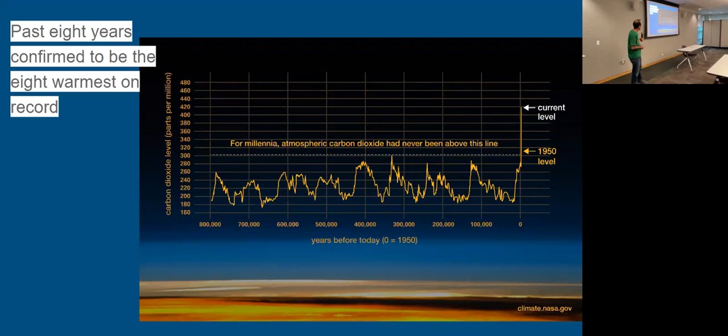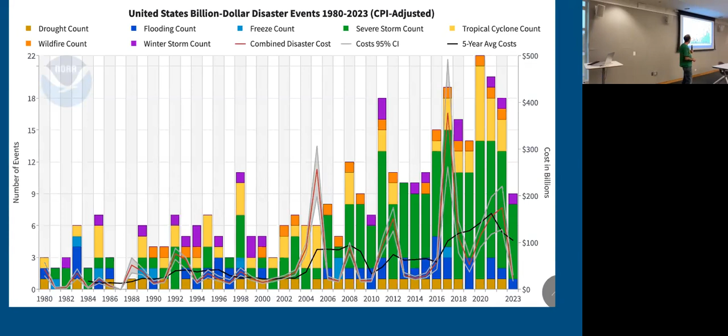But say that doesn't matter to you, fine. Economics matters to us all, right? So this stuff is expensive. This is kind of a busy slide, but historically, inflation adjusted, we've had roughly 3 billion-dollar climate incidents in America per year. In recent years, that's increased quite a bit, and that's a cost that we all are paying, whether we realize it or not.

So what to do about this? Well, you've heard the term carbon footprint, right? So where did that come from? Quick quiz here. Was it Al Gore? Did Al Gore make that up? Or Bill McKibben? I don't know if you guys know who Bill McKibben is, 350.org. He's a writer, scientist, environmentalist. Was it Greta Thunberg? Did she make that up? Or was it British Petroleum?

The answer is British Petroleum, right? Because they want to make it seem like it's our problem, but really we're not the problem. The problem is the fossil fuel companies, and like tobacco companies, they sell a product that we're, as a society, addicted to. And what makes changes is government action, large social movements, elections.

These are things that are going to sway the needle on this. But that being said, each of us makes choices. What each of us does matter. And these tips I'm going to give today are things we can do to make a difference. And if you do it and you do it and you tell your neighbors, all that can add up. And you're going to save money. You're going to feel better about what you're doing.

But don't let this stop at your front door. Always try and do more so we can kind of roll this up and grow it. So this is kind of our goal, I think. This is where I'm hoping to get as many people as possible.

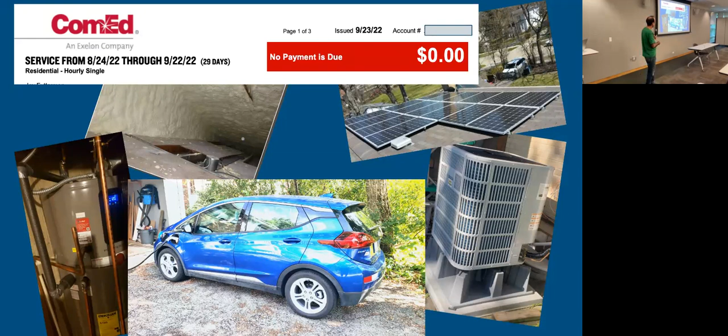Bottom right there, that is my heat pump, air conditioner, heat pump heater. So that takes care of my heating and cooling through 90% of the winter without burning any fossil fuels. So these are all things that we can do at our house that are going to save money, lower carbon emissions, and make you feel good.

So I've got 5 main themes that I'm going to kind of go through with this presentation. One, I've said this a bunch of times already, but this will save money. There's the Inflation Reduction Act that passed last year. So we'll talk about some of those incentives that are available now.

The cleaner choice is the greener choice. We're going to talk about how to use less power, conservation and efficiency. We're going to talk about using cleaner power, electrifying things, and then using power at different times of the day. And talk about the importance of planning ahead rather than buying things in an emergency, and then things to take it beyond your house.

So, Inflation Reduction Act. I think most of us have probably heard of that, have some vague idea of what's in there. The best sites, if you want to learn more about it, are rewiringamerica.org and energy.gov/save. Those are the best sites. They're very comprehensive about what it means to individual homeowners. And the Inflation Reduction Act has got a whole bunch of tax credits and income-based rebates that can save you over $20,000 in a transition to cleaner, cheaper, and more efficient homes.

So what does a really efficient house look like? A net zero house, or something close to it. So on the roof, we're going to have some solar panels. We're going to have efficient lighting. I think most of us have probably got rid of those incandescent bulbs by now. Low flow fixtures in our plumbing means you're going to use your hot water more efficiently. Well insulated walls and windows.

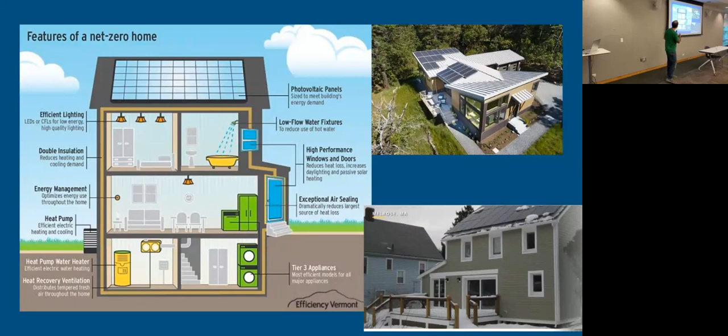We're going to look at all the sources in the house that are using fossil gas and replace them with electric versions. So that's going to be in our kitchen, our water heater, possibly our clothes dryer, and our heating, ventilation, and air conditioning system. And a net zero house can look kind of futuristic, like the one in the top right there, or it could look pretty average, like the one in the bottom right. It just comes down to being smart about how you use energy and how you build your house.

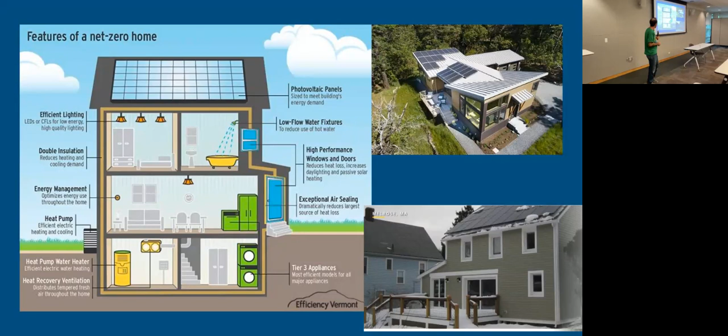So within the Inflation Reduction Act, everybody can save, right? So there's a 30% solar credit, and I'll go into that in more detail later. There's a $2,000 tax credit for heat pump air conditioner and heaters, a $2,000 heat pump water heater credit. You can get $1,200 for weatherization - doors, windows, insulation. You can get $150 off a home energy audit, which is really the best place to start.

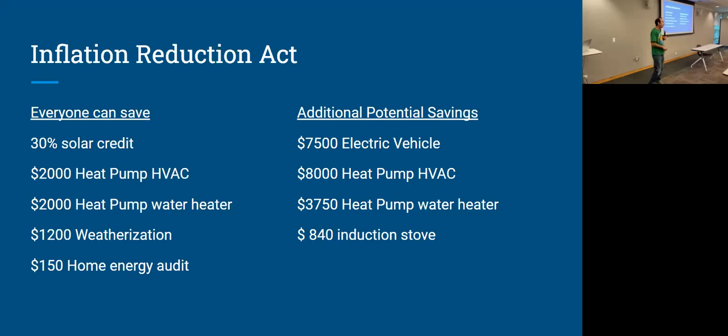And there's additional potential savings: $7,500 off of qualifying electric vehicles. Income qualified people can get up to $8,000 off their heat pump HVAC, and an additional $3,750 off their water heater. And there's a credit in there for induction stovetop as well. There's a lot more, but those are kind of the high points, and you can see that this all can kind of add up. So again, those two sources I'd recommend for a real thorough listing of all the credits: rewiringamerica.org, energy.gov/save.

Okay, so that's the higher level stuff of how to save. Now let's talk about using less power: conservation and efficiency.

ComEd, our utility, will do some free home energy audits. They're pretty basic, but they do provide replacement light bulbs, some pipe insulation, change out faucets and put little aerators on there. They can get you a smart thermostat, power strips, things of that nature. It's worth doing, it's free.

But really where the money is, is with a professional energy audit. These are qualified people that go through your house top to bottom, system by system, and tell you what's right and what's wrong. They'll do a blower door test, which looks at the building envelope to see where all the leaky parts are, where money and energy is literally flying out the roof or out the window. They'll take a look around with an infrared camera, and also assess your appliances, safety issues, and ventilation.

So that was really transformational for me. I thought I was pretty into this stuff, I kind of had a good idea, and then I had an energy audit and it just opened my eyes to all sorts of new things.

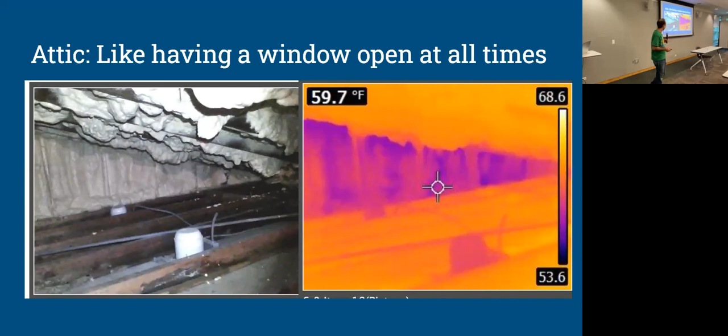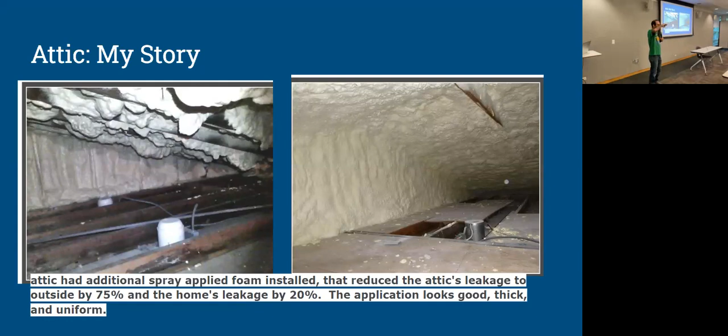So I had additional spray foam insulation put in. It reduced the leakage of the attic to the outside by 75%, and overall reduced my home's leakage to the outside by 20%. So it really tightened up my building envelope. What does that mean? It means my heating bills and air conditioning bills are going to go down because I've got a good thick shell on the roof. This is that part where there was a void before; now it's really thick, uniform insulation.

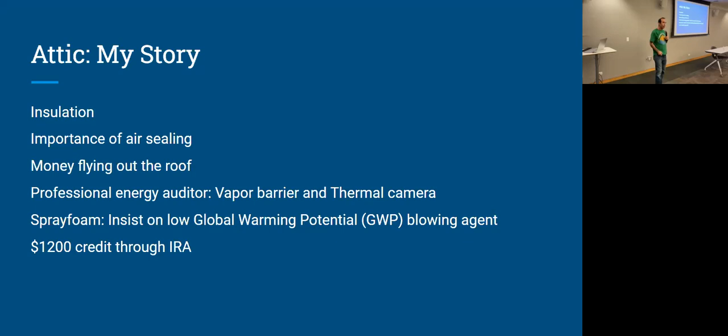The other thing he pointed out was that with this particular type of spray foam, it has to be of a certain thickness to be a vapor barrier. He said with it as thin as it is, moisture could be getting underneath the roof decking, so I wanted to make sure I got that addressed. Spray foam insulation seals all the cracks very well, but you have to look for one with a low global warming potential blowing agent. And like I mentioned before, weatherization, including insulation, there's a $1,200 tax credit through the Inflation Reduction Act for that.

Other things the energy auditor did included the blower door test. We looked at things like my door to the garage, and just looking with the infrared camera, you could see where all the heat is going out and cold air is coming in. There could be simple fixes you could do, just like a door sweep from the hardware store for $10, that cut down on the draftiness by quite a bit.

Or in the living room, programmable thermostats are great. You can set it so when you're sleeping, it gets a little bit colder, and when you're awake or out of the house, you don't need to use as much heating and cooling when you're at work.

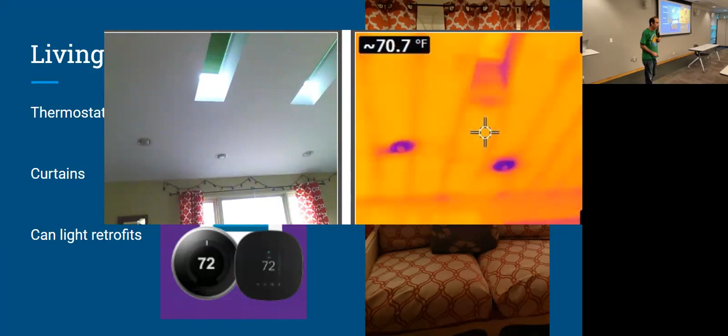Simple things like curtains - if you have a southern window in the summertime, draw the curtains. And can lights, recessed lights in the ceiling - this was an eye opener for me as well. Take a look at the infrared camera there. Those are super leaky, basically holes in the ceiling that energy is escaping through. You can get a can light retrofit that will seal right up against the ceiling, with LED lights, and they're cheap, easy to install, and they eliminate that leakage issue.

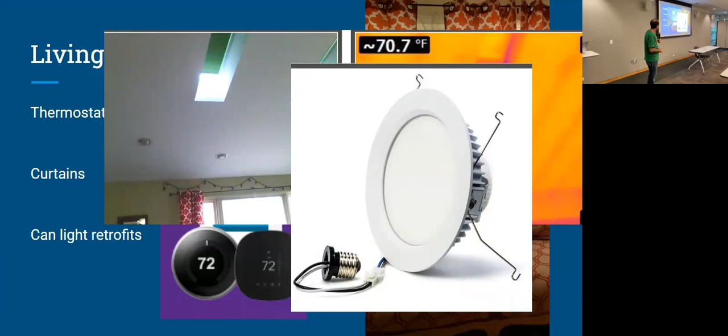Let's talk about using cleaner power, electrifying everything, and also shifting our use. This is something a lot of people don't think about - you get your electric bill every month, you pay it, but where does that electricity come from, and how much does it really cost? Most of us are just on a set price, paying the same cents per kilowatt hour whether we use that energy in the morning, overnight, or at peak times between 2 and 6 in the afternoon. But because demand and supply fluctuate, the value and price of electricity fluctuates. I'm on an hourly pricing system with ComEd.

If you have solar, if you have an electric car, this may make a lot of sense. You're going to be paying a variable price for electricity depending on what the actual real-time price of electricity is.

This is an interesting example from a date in May last year. The blue is what they predicted, the red is the actual prices. Overnight, when I charge my car, the price of electricity actually went negative because there was a lot of extra energy on the grid and not a lot of it was being used, so they just needed to dump it. So ComEd actually paid me to charge my car overnight. Then that day at 5 or 6 o'clock, probably a warm May day, the price of electricity really shot up - to 15 cents a kilowatt hour, which is pretty expensive. During that time, my solar panels are pushing out electrons more than I'm using at home, so I'm actually selling my electricity to the grid at 15 cents a kilowatt hour, and buying it overnight for -2 cents a kilowatt hour.

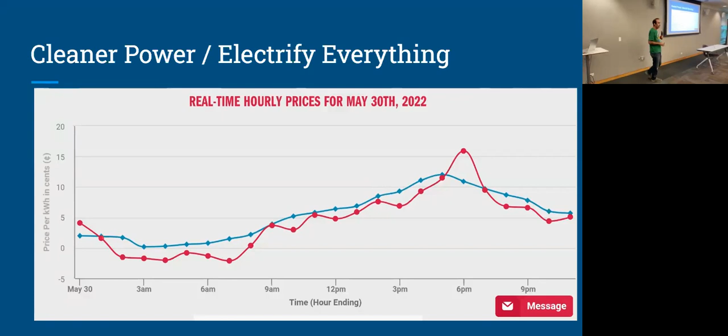So ideally, we want to avoid using electricity during those peak times. To whatever extent you can, shift the load of electricity. If you have an electric car, don't charge it between 4 and 6 in the afternoon, charge it overnight. If you want to run your dishwasher, most dishwashers have a delay feature, so you can delay it for 4 hours - that's what we do. We put the dishes in after dinner, press delay, so it starts up at midnight. Same thing with your clothes washer - you can set that to delay in many cases. And wash in cold water - the majority of energy a clothes washer uses is actually going to heat the water, and it works fine with cold water.

ComEd has a number of programs to help people shift their load. They have the hourly pricing we talked about, and time of day pricing, which is a simpler version - peak, off peak, or overnight. There's a peak time savings program where they'll send you a text message, and if you decrease your power use during that time, they give you a bonus. And there's an air conditioning cycling program, where for 15 minutes of every hour during peak demand, they'll shut your air conditioning off. If you go to their website, Manage My Energy tab, they have a lot of good information. So check that out - if you have solar or an electric car, hourly pricing is probably going to save you quite a bit of money.

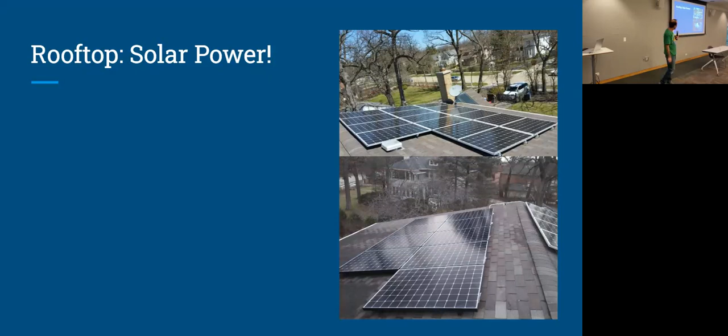So, electrifying things. I mentioned a couple times that I've got solar on my roof. I initially installed in 2016, then had it sized to cover all the electricity needs for my house. Then I got that electric car and started buying electricity again, so I put some more panels on. The top is my original installation on the east side, the bottom is on the west side of the house. And it basically covered all the electricity I needed to run my house and my car.

And then I got my heat pumps, and now I'm kind of back to buying electricity again during part of the year. But solar is the cheapest way to get electricity in Illinois.

The Illinois Solar Education Association, I'm an ambassador with that group. We've got a lot of great information on that.

There's an income-qualified program called Illinois Solar for All. If you live in Lake County, family of four making $83,000 or less, you can pretty much get solar for almost nothing. If you don't have a roof that's suitable for solar, say you're a renter, live in multi-unit housing, or have a lot of shading issues, you can do community solar.

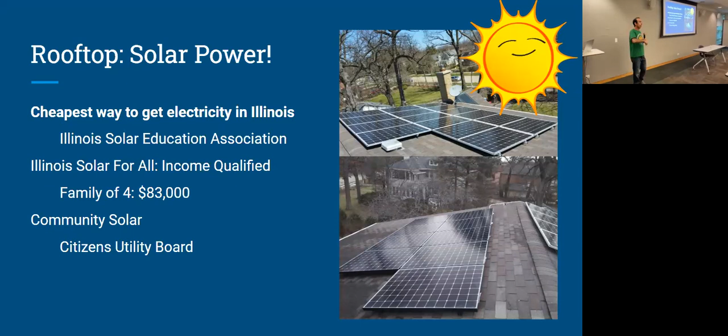Citizens Utility Board is a great resource for learning about community solar. Essentially, you're subscribing to a field of solar panels somewhere, typically in rural Illinois. You say, I will buy my electricity from this field of solar panels, and they'll sell it to you for less than what you're paying ComEd currently.

So again, that's an example of my electric bill, zero. The solar panels, like I said, there's a 30% federal tax credit for this. So whatever it costs—materials, labor, permitting, inspections—bottom line cost, you send that in with your tax return, and you'll get 30% of that back from the federal government.

Illinois has a program which will cover another 20 to 30% of your installed cost. It's called the Solar Renewable Energy Credit Program. So with those two things together, you're going to get more than half of your expenses for solar paid for.

There's net metering. Net metering means during the day, when I'm making more energy than I need, I'm feeding that out onto the grid, and my smart meter is keeping track of how much energy I'm putting out onto the grid. Then at night, when the sun's not shining and I'm not making electricity, I'm taking energy from the grid, and it's keeping track of that.

So it kind of runs a balance, and that balance carries over from month to month. May, June, July, I typically make excess energy. Then December, January, February, when it's dark for 16 hours a day, or there's snow on my panels and I'm not making energy, or at night, it all kind of balances out.

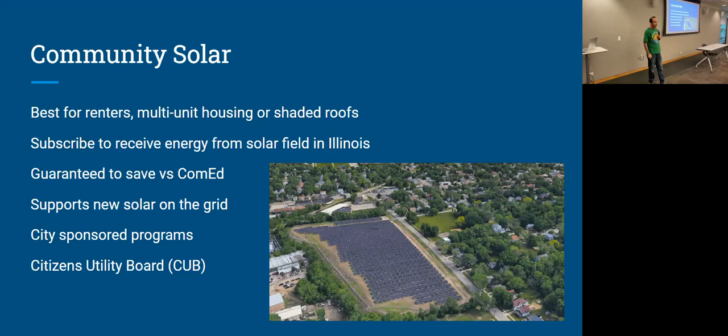Citizens Utility Board is the best resource, again, for community solar. I would check them out if this is something that would appeal to you.

All right, more electrification of stuff. So electric vehicles. This may be perhaps the biggest way to reduce your personal emissions. The transportation sector in the United States is actually the largest source of greenhouse gases. And it's way more fun to drive and own than gas mobiles.

I think any Tesla owner could tell you that, it's a totally different driving experience, and they're never going to go back to driving a gas car. I mentioned it costs me about 2 cents a mile to drive. Compare that to when we had $6 a gallon gas not too long ago.

Their acceleration is faster. The weight of the car is really low, so they corner really well. They're quiet, they're smooth. And they don't require very much maintenance at all. There's no oil changes that you have to do. All I do is rotate my tires, basically. I don't know about the Tesla owners out there, but it's really not much that has to be done.

The Inflation Reduction Act has that $7,500 tax credit. Now, there are some strings attached to that. There are income limits. There are price limits on the vehicle. It has to be made in North America. There are provisions that require elements of the battery to be sourced and manufactured in friendly countries. So there are lists of qualifying vehicles that you can find online.

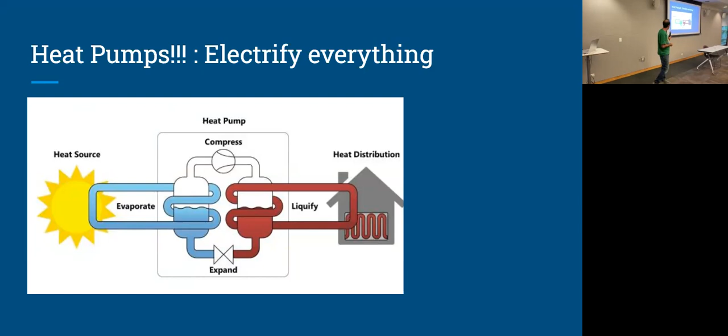That's the heating cycle, and the cooling cycle is just the exact reverse. Our refrigerators and air conditioners all work this way, but only in one direction. A heat pump, as I'm talking about it, works both forwards and backwards. And the cool thing is they're just moving heat—they're not creating heat.

If you think about your hot water heater, you're generally burning methane to create heat to heat up water, or your furnace burning methane to heat air circulating through the house. Well, a heat pump is just moving heat, not creating it. So it could actually be 300 to 400% efficient versus a really efficient gas furnace, which is like 95% efficient.

So the easy way to do this in the house: if your air conditioner is nearing the end of its life, replace it with a heat pump. In Illinois, it gets cold in the winter, and heat pumps get less efficient when it's cold. There are models out there that can go below zero, but the easy way to go is just, if your AC is near the end of its life, replace it with a heat pump.

That's what we did. The heat pump, I have it set to heat the house all the way down to like 15 or 20 degrees. If it gets colder than that, our gas furnace kicks on. It's probably, climate-wise, a little more efficient actually to use the gas furnace than to use a ton of electricity to run the heat pump when it's that cold.

But it cools the house more efficiently than our previous air conditioner, and it was actually cheaper than just a one-way air conditioner when I was pricing it out with our HVAC contractor. So AC replacement is the easy win—it uses existing ductwork, why not? And like I mentioned, it does hot water as well. I'll talk about that in a bit.

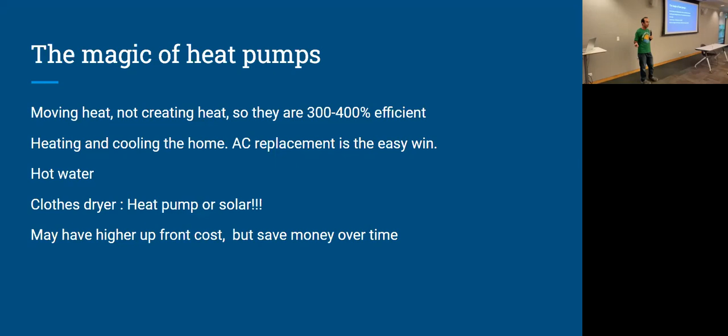All right, so plan ahead. Don't do this stuff in an emergency. Learn from me. So my story, I've wanted to get a heat pump for a while. I'd started doing some research. I'm like, oh, my air conditioner is good for a few more years. I'll research things and then I'll get a heat pump and it'll be great.

But I was out tinkering with it in May last year and it stopped working. I just tried cleaning it out and I'm like, oh, I broke it. And then the guy came out and he's like, oh, it requires a new circuit board. It'll be like $1,000+ to fix, but it's also 10 years old. I'm like, well, I guess we're going to replace this now instead of in a couple of years.

So ideally I would have done a little bit of research first, maybe had a few quotes. But fortunately I talked to my energy auditor. He said this is a good company, they do a lot of heat pumps. And so they hooked me up with the one that you see right there.

I mentioned building heating is probably our number one source of energy use in the home, especially in this climate during the winter. So if you purchase another air conditioner now, just a one-way air conditioner that's not a heat pump, you're basically locking in your emissions for the next 15 years. So now is really a good time to do this.

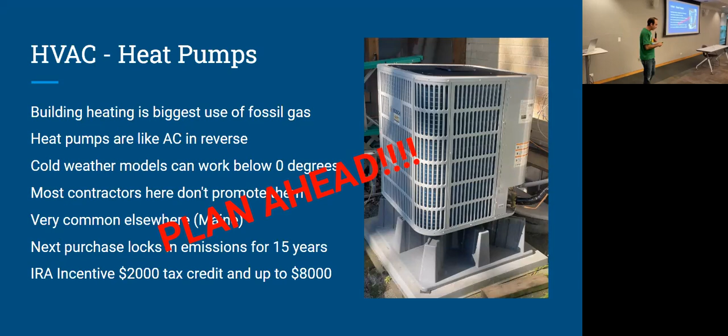Water heaters. So a real simple thing you could do is just insulate the hot water pipes that come out of there. If you go down in your basement and feel the pipes, some of them are going to be hot. That's basically just a continuous loss of heat from the hot water heater. So you could spend $10 at the home improvement store and get pipe insulation, which will really reduce the amount of constant heat loss you're having.

My personal story with this one: we had our energy auditor come by. He looked in our basement and said if your furnace is on at the same time as your hot water heater is on, there's a high likelihood that the furnace is going to be sucking carbon monoxide out of the flue stack from your hot water heater, just because of the way the ventilation in that basement was set up. I wasn't happy to hear that. So that prompted me to get a heat pump water heater pretty quickly.

If we all made the switch to heat pump water heaters, we would save millions of tons of carbon every year. There's a cool thing hardware-wise in my heat pump that enables Wi-Fi connection to the utility. ComEd doesn't do this yet, but in Hawaii they're just starting to. It's part of demand response: if there's a spike in energy demand, the utility can send a signal to all the hot water heaters to shut off and stop heating water, and that demand will come down. Or if there's a surplus of energy, they can crank up the heat on those hot water heaters to soak up the surplus, storing energy as heat in hot water tanks throughout the area. That really smooths out the ups and downs.

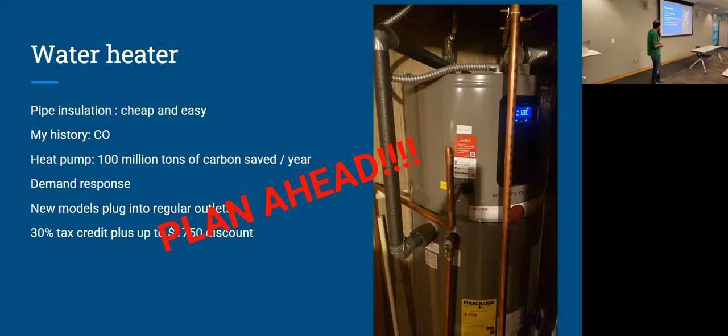All right, our final theme: take it beyond your home. Money matters, money talks. There's an interesting report called 'Banking on Climate Chaos' from the Rainforest Action Network. Banks are there to make money, and they'll put their money where money is to be made. Chase, Citi, Bank of America, and Wells Fargo are among the top financiers of fossil fuel extraction and development. If that doesn't appeal to you, you can decide to bank elsewhere.

There are green credit card options — you can find those at greenamerica.org. There are green credit unions and banks that take the money their members deposit and turn it around as solar loans or clean energy loans and that sort of thing. So money talks — think about what your money is saying.

Do this at home, but if we're going to really make any change, it's going to take more than just me electrifying my house and you electrifying yours. We need to spread this. Talk to your friends and neighbors, volunteer with an environmental organization, talk to your city government, your school board, your employer. Schools can save a ton of money by going solar.

There are specific programs for schools to go solar, and free energy audits for schools. It's just taxpayer money we're essentially wasting by not doing this stuff. But school boards have a lot on their plate — they may not realize this. If you say, 'I'm a taxpayer, I want to make sure you're being a good steward of my money, why don't we have solar on the roof of the school?' — that's a fair question to ask. And of course, vote.